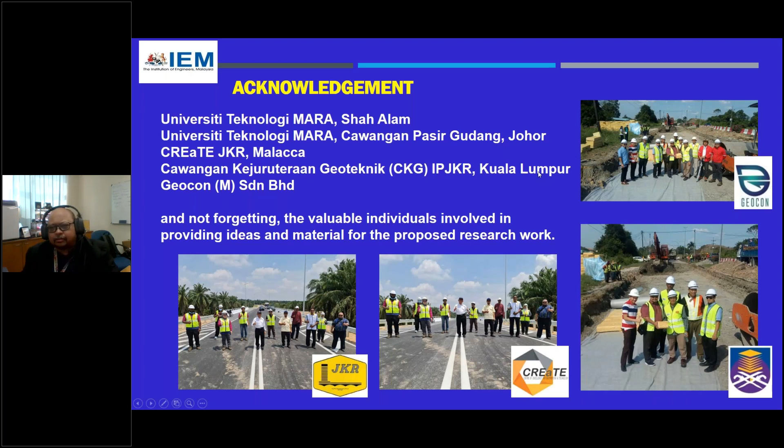It has soft to very soft shear strength, undrained shear strength, so the resistance is quite low. It is always prone to consolidation settlement. Even though we have constructed the road, surcharged it, and filled the embankment to provide a proper platform for the level, you still have continuous settlements after it is in service, especially at the transition section between the bridge and the earth embankment, or the pile embankment approach to the earth embankment.

So to understand the behavior of soft clay, the concept of consolidation has always been the key. We want to come out with ideas to resolve the excessive settlement that the soil experiences when you have overburden pressures.

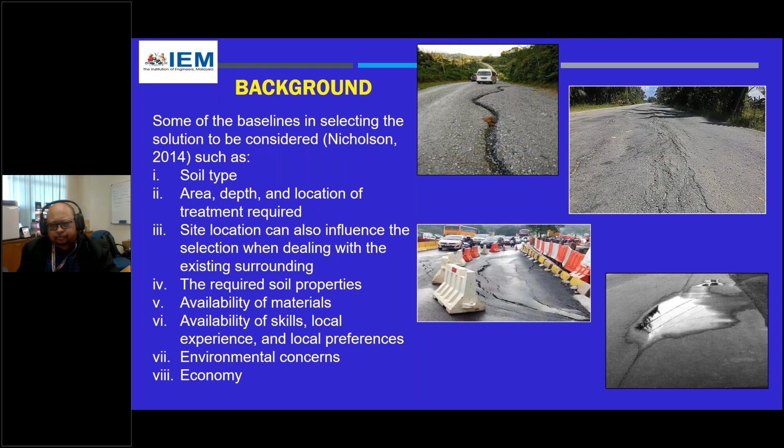Now, I want to share an idea with everyone here: we are trying to integrate between the volume change behavior and also buoyancy. So the idea is to use a lightweight material.

We talk about settlements—they are basically divided into three phases: immediate settlement, primary consolidation settlement, and then secondary compression. Now, the thing that is always causing problems for us is the consolidation settlement.

When we actually build our embankment, we estimate the consolidation settlement based on the compression index or the coefficient of volume compressibility, either CC or MV. We look into the compression characteristics of the soil, and how long it takes for the excess pore water to dissipate.

So we are talking about the development of excess pore water pressure, because hydrostatically the water is there in the ground. But as you load it, it generates excess water pressure, causing a massive effect to the soil. The dissipation of this excess water pressure reduces the void ratio, and as the void ratio reduces, you have a volume change, which is settlement.

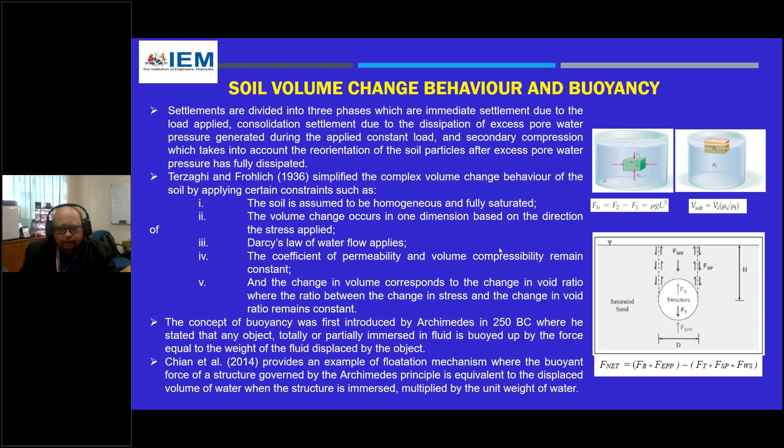So here's the concept: you have a fluid that exerts a net upward force on any object it surrounds — that is the buoyant force. This force is due to the increased pressure at the bottom of the object compared to the top, and it acts at the bottom, which stabilizes the lightweight material.

If you consider a cube with sides L, the buoyancy force equals F2 minus the force acting downward on the material, which equals the density of water times the gravitational acceleration times the volume of the material.

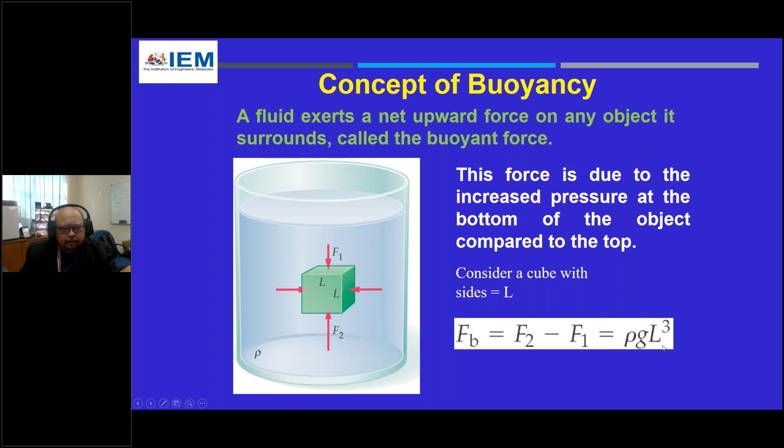So the fraction of an object that is submerged when it is floating depends on the densities of the object and the fluid. So your submerged volume, or solid of volume with density, floating in a fluid of density. So you have that volume submerged equals to volume of solid times the density of solid over density of fluid.

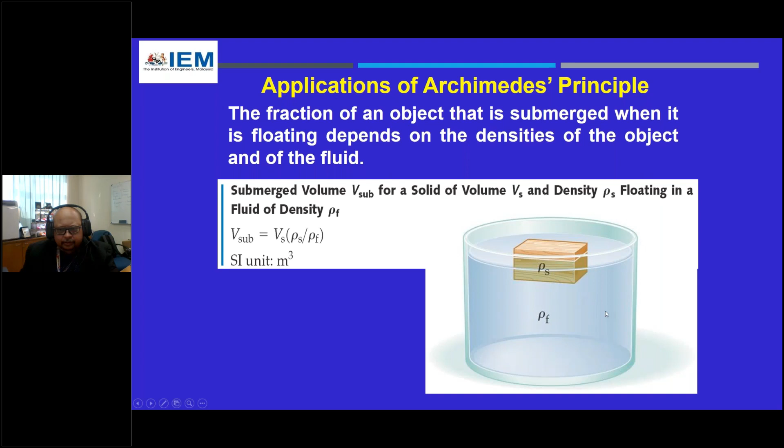So interesting thing is, how is it going to be integrated in consolidation? Sometimes you wonder, right? You have an embankment, the ground, you have the soil, fully submerged, loaded, experience settlement. And when you experience settlement, you have a displacement of water, which is the excess pore water pressure basically dissipating, going back to hydrostatic water level. Now, when you talk about consolidation, it is basically removal of excess pore water, not removal of water. If you're removing the water, it's still there in the ground.

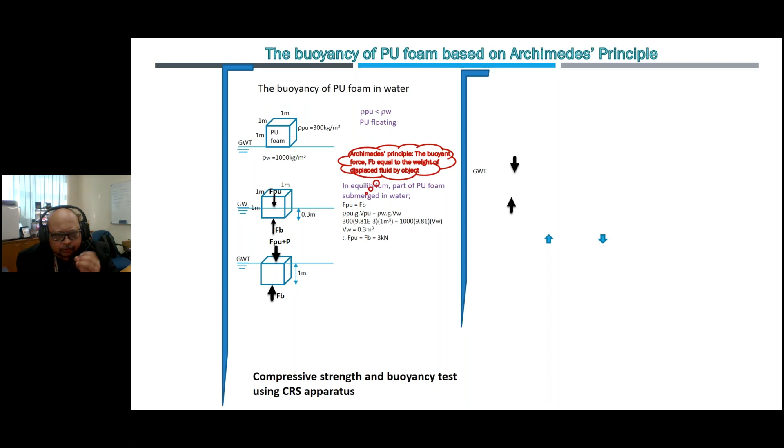So it is a removal of the excess pore water pressure that is generated from the load. Now, in the case of buoyancy, Archimedes principle: the buoyant force equal to the weight of displaced fluid by the object. So the buoyant force of the PU foam is equals to Fpu, which is 3 kilonewtons.

So how to make the PU foam fully submerged below the groundwater table? You have to add load. So the load there plus 6.81, because initially the buoyancy force is 9.81 kilonewtons, pressure is kilonewtons per meter squared. So you need force of 9.81 minus 3 to actually have the foam fully submerged in water. So the additional load would be 6.81 kilonewtons.

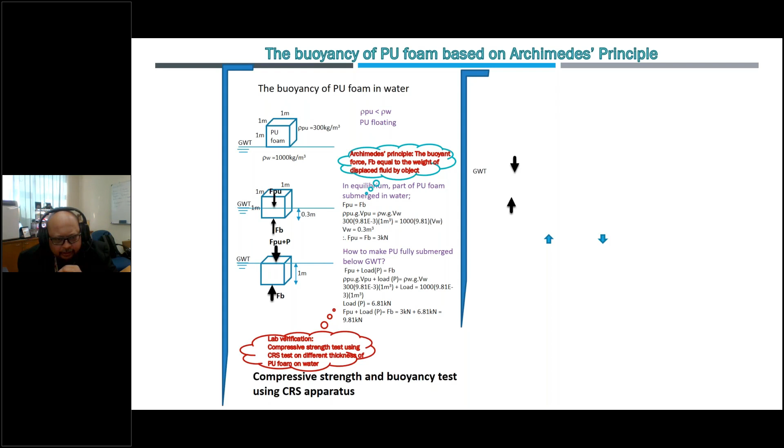And this has been verified from the compressive strength test, using the consolidation test, using the CRS test on different thickness of the PU foam.

So how do you get that into saturated soft clay? Say you have 1 meter PU foam in stiff clay. So the PU foam is placed below the ground level. And to ensure the PU foam is placed below the ground level in saturated soft clay, first condition, you have to do a test.

So it's proven from the CRS test, for stiff clay and also for soft clay. So this is the result from the calculation. So you have the buoyancy force must be more than the force from the polyurethane for uplift to occur. So to prevent uplift, you have to apply a load P. So that is where you have the buoyancy force 9.81 minus the load from the PU foam, so you have an additional 6.81 kilonewtons. So if more than 6.81 kilonewton load is applied, that means you have vertical displacement.

This has also been verified using numerical simulations and laboratory tests. And during the time of this research, we have conducted also a buoyancy test in Rowe. The buoyancy test, and for your information, water is incompressible. So you have basically the bulk stiffness of water of about 2.2 gigapascals, whereas the stiffness of the soil varies from soft to stiff, between 1 MPa to about 100 MPa.

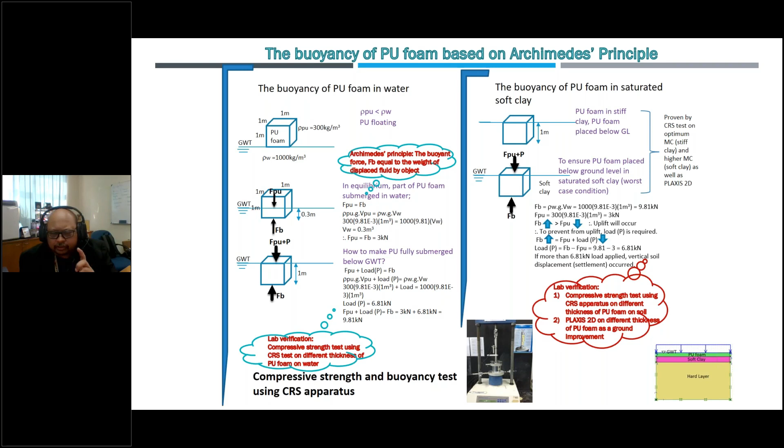So we look at the theory of consolidation. Now, the thing is, in consolidation, for initial stress, Terzaghi introduced this spring, piston and water analogy. So you have a spring as the stiffness of the soil, and then you have water. So as you load onto the spring and water, it will actually generate excess pore water pressure.

So when you open the valve, allowing the water to actually dissipate, it will cause volume change. That means it will cause settlement. And at this time, the excess pore water pressure starts to decrease or dissipate. So when it goes back to hydrostatic pore water pressure, the ideal condition of Terzaghi's theory is that there will be no more settlement. So it's achieved 100% consolidation, and you would have no settlement anymore.

But in reality, after the soil has experienced primary consolidation, there is secondary compression, where settlement still occurs but at a minimum rate, as reorientation or rearrangement of the soil particles occurs. This is in saturated clay.

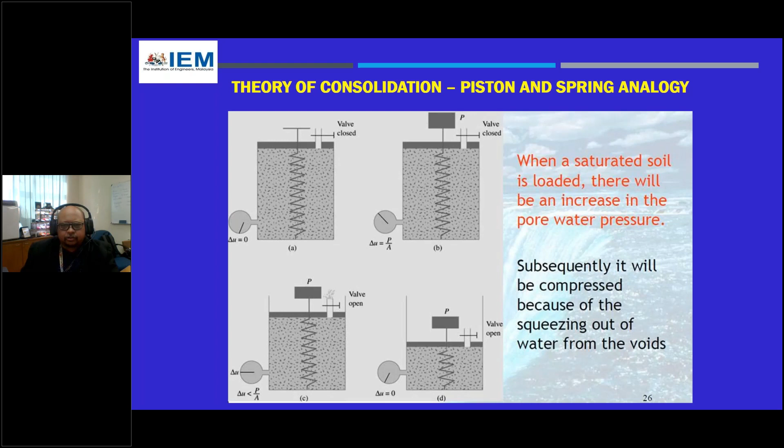But if you're talking about peat soil, they have another phase, termed tertiary compression, due to the disintegration of the organic material in the peat. That's the problem with peat soil - it's always compressing, and it has extremely high moisture content, more than the solid body itself.

So to make things easier, we want to understand the concept of consolidation. We take a clay layer at the center with thickness H, with sand layers at the top and bottom. This sand layer acts as a drainage path for water to flow, and presumably this is one-dimensional consolidation. So we put it in an oedometer casing, a specimen of 20 mm height, 50 mm in diameter.

Can all the participants see my arrow actually? If not, can just... Dr. Aswani, can you see my arrow slide here? Yes, yes, okay.

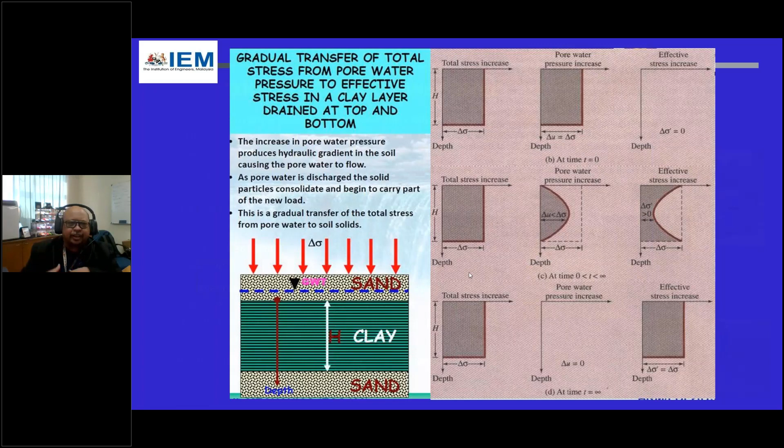With that theory, we've come up with a lightweight material to address this problem. One of the lightweight materials I use for construction and rehabilitation is polyurethane foam. It's either a single-part or two-part polymer, within the carbamate group, referred to as the urethane groups in the backbone of the structure.

When it is two-part, it is a reaction between the isocyanate part A and the microglycol known as the polyol, or a combination of microglycol with chain glycol extender. To understand it easily, the isocyanate part A is the hardening agent, whereas the microglycol or polyol is the expansive agent. You mix that together with a certain ratio, and you get this PU foam expanding almost 10 to 20 times its liquid volume.

This is where it actually reduces the cost of the works and the injection part. I have introduced this polyurethane foam injection system for rapid ground repair and remediation without excavation and replacement, so you don't need a very big excavation. Basically, to repair the subgrade, we can just inject it, and it will restabilize the subgrade by increasing as it expands, recompacting and increasing the density of the soil, densifying it without applying additional overburden pressure to the foundation soil because it is lightweight.

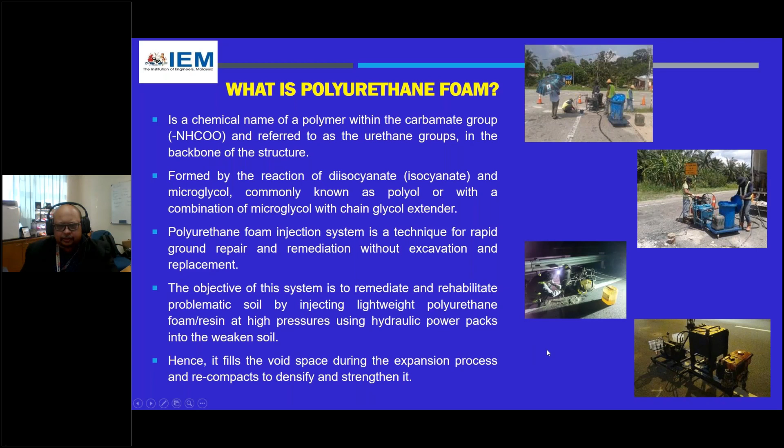Basically, this foam has two types: one is hydrophobic, and the other is hydrophilic. Hydrophilic polyurethane is basically not suitable for ground repair, but if you want to plug an area with a lot of moisture or water, or capillary rise, you can use hydrophilic polyurethane, because when in contact with water, it will expand up to 5 to 7 times its original liquid volume with the presence of moisture, where you have water content.

However, for ground repair, we use the hydrophobic type, which actually expels water.

The rate of expansion is between 6 to 20 times its liquid volume. Based on my experience, when we want to inject into the ground with loose material, it will expand up to 10 times. When it is voided underneath a pile, embankment, or slab, it expands approximately up to 15 times its liquid volume.

So, hydrophobic polyurethane is a foam with an accelerator to control the curing time. The advantage of using this foam is that it can expel water during expansion before it stabilizes the soil. The polyurethane is basically a lightweight material with high insulation quality, high expansion rate, and quick reaction time.

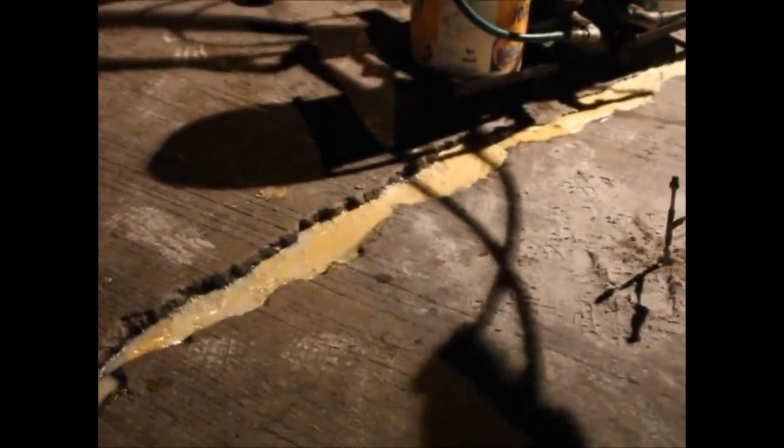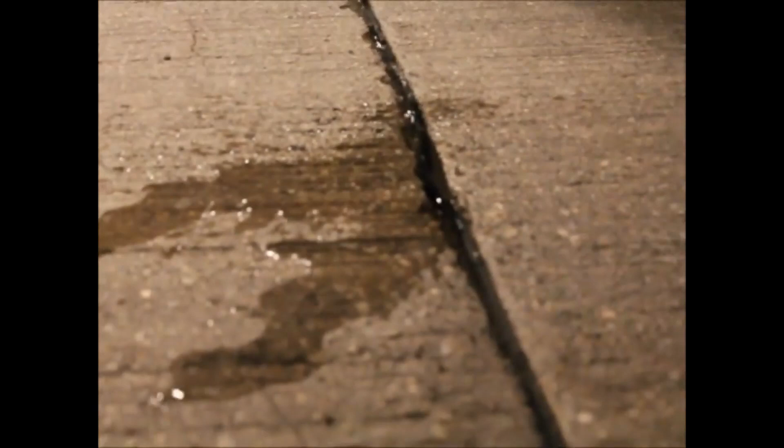Okay, back to my screen.

From the emergence of the PU foam injection system as one of the alternative methods to solve ground settlement issues and rehabilitation of existing superstructures and infrastructure, we thought we want to introduce something like an EPS type. Instead of EPS blocks, we introduce a flatbed, or you can say mattress, right? A polyurethane flatbed, to reduce the overburden pressure for new construction of embankments and platforms.

At the same time, we want to introduce buoyancy to reduce the effect of settlement on soft saturated deposits. Therefore, the idea of integrating consolidation and buoyancy is the key in designing and constructing the PU flatbed, to support the platform above it and also provide buoyancy, therefore reducing the effect of consolidation settlement.

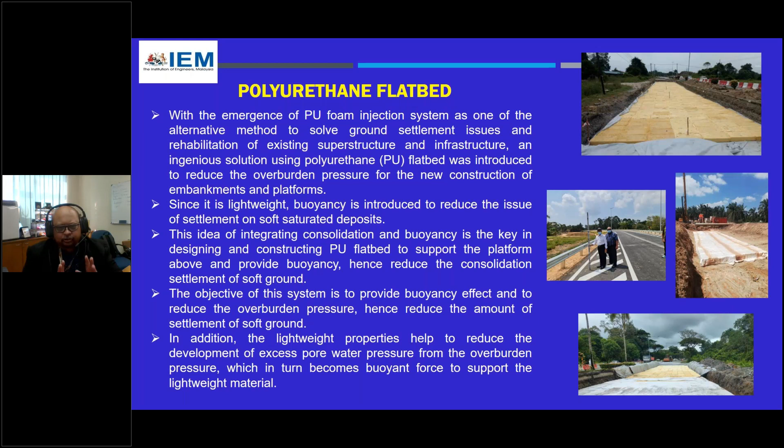So the objective is to provide a buoyancy effect and reduce the overburden pressure, hence reducing the amount of settlement of soft ground. This lightweight property helps reduce the development of excess pore water pressure, which in turn becomes a buoyant force to support the lightweight material. So instead of the excess pore water pressure dissipating laterally anywhere in the soil, it basically transfers as a buoyant force to support the lightweight material.

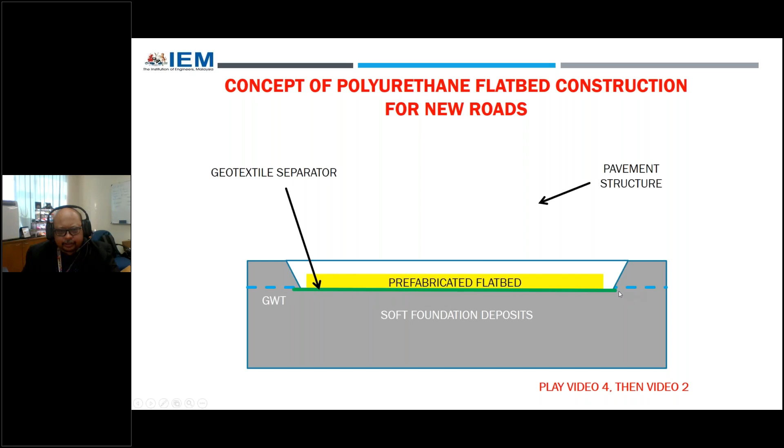So here is the concept. You have, let's say, a soft foundation deposit. You excavate, then place the geotextile separator and wrap it. Then you place the PU flatbed, wrap it, fill it, and construct your road.

Now, can you play video number 4? Then play video number 2.

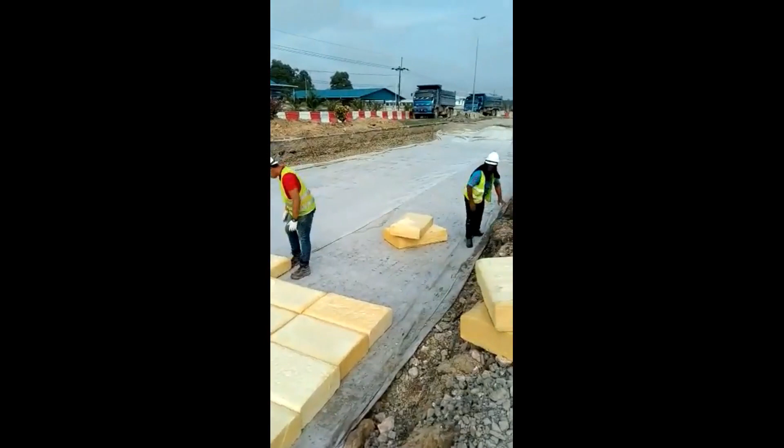Okay, this is how it's being placed on the excavated area. You can see it is very lightweight, and you can arrange it easily.

So it's actually quick. When we did this, about 50 meters long, it took them only about 4 days, together with the gluing.

If you take a concrete block, it's quite difficult to handle at this size. This material is lightweight, only about 80 to 150 kilograms per cubic meter.

Okay, can you play the second video where you have the gluing?

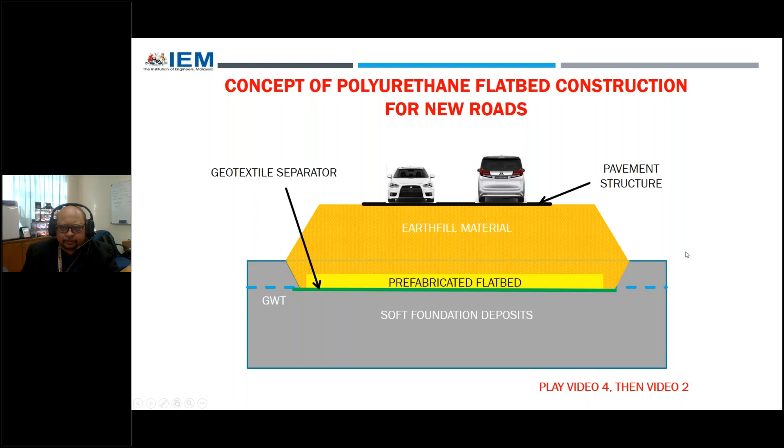So basically, how do we want to actually design this now? I considered this idea with the team, the research team, and also with the PhD students. So we came up with the idea.

When we want to design the PU flatbed, we take into account the effect of consolidation and buoyancy. The consolidation settlement equation was modified to integrate the buoyancy effect of the PU flatbed. Hence, the pore pressure due to the PU flatbed, U_HPU, is introduced. Since the lightweight block is introduced, the existing hydrostatic pressure U naught is also taken into consideration.

Initially, when we calculate for consolidation, the variable here is actually sigma naught prime, the effective stress of the soil, considering consolidation whereby the water dissipates as you consolidate.

But in this case, when you introduce a lightweight material, you have that hydrostatic pressure initially there. It's like water—you're putting something on top of water, then it floats. Put a barge on top of water, it floats. Then you put sand a little bit on top of water, it still floats, partially submerged, but it still floats. So what is actually holding it up?

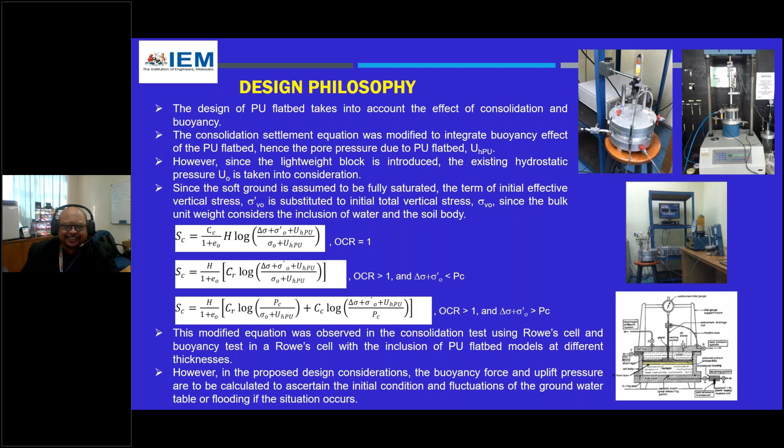We recorded the settlement - the uplift is between 2 mm and the settlement is 2 to 4 mm. So I say, alright, should be okay. This is the test that we conducted, the Rowe cell apparatus. We did a buoyancy test where we put in only water and a PU material on top, to see the compressibility of water, since water is incompressible. I'll show you the data later.

And then the other one is the CRS test, with inclusion of PU foam and the soil. In the Rowe cell as well, we also did a soil sample and PU sandwiched between the sample and the loading diaphragm.

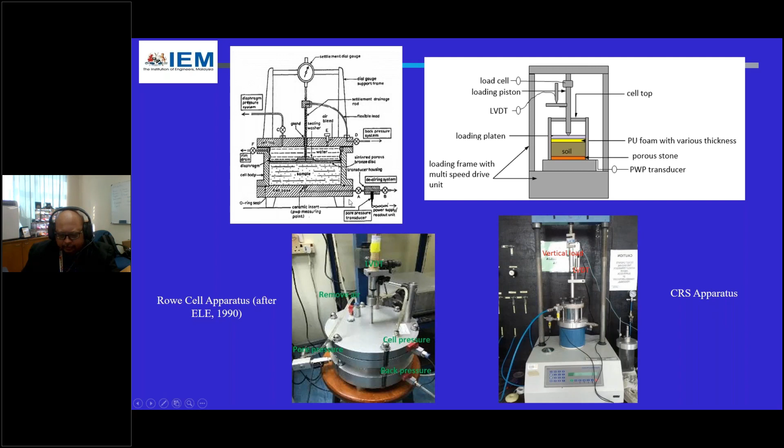So this is the testing material - you can see two parts of the PU foam. The tea color is the polyol, and the black, coffee color is the isocyanate. You mix that together, agitate it, and it starts to expand within 5 to 10 minutes. Then you wait half to 1 hour for it to cure to 2/3 of the strength, and you want to wait for it to fully cure after 24 hours.

So basically we did the consolidation test and buoyancy test in the Rowe cell to control the distribution of pore water pressure during the consolidation and volume changes in the cell during the test. In a Rowe cell, the test sample is loaded hydraulically by water pressure acting on a flexible diaphragm, as shown in the diagram. The drainage of the sample can be controlled, hence you can measure the pore water pressure. Back pressure is applied to simulate the in situ soil condition.

This test, on the loading, follows similarly to the oedometer apparatus, whereby each load is applied constantly for about 24 hours. We observe the displacement and changes in the pore water pressure. As the excess pore water pressure dissipates and becomes constant, then we can apply a second loading stage.

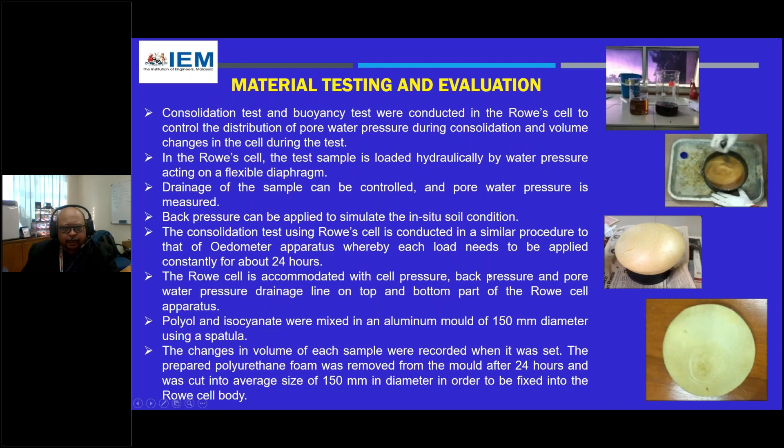Okay, this is how we mix it. Mix the two, and then wait for it to expand, and then we cut it nicely so that we can fix it into the Rowe cell.

If it's water, then we fill water and put it on top. If it is soil, then we put the PU foam on top of the soil, right?

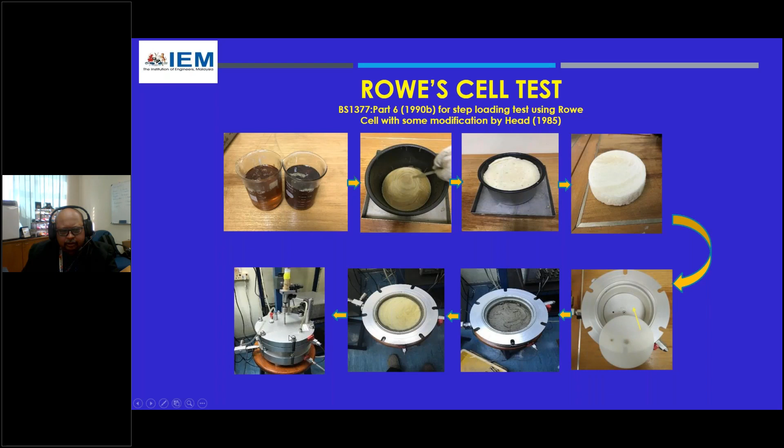Similarly, this is what is being done in a constant rate strain test. Okay, unfortunately this one has some difficulties in making it cylindrical, right? Then we place it on top, put in the load cap, and run the test.

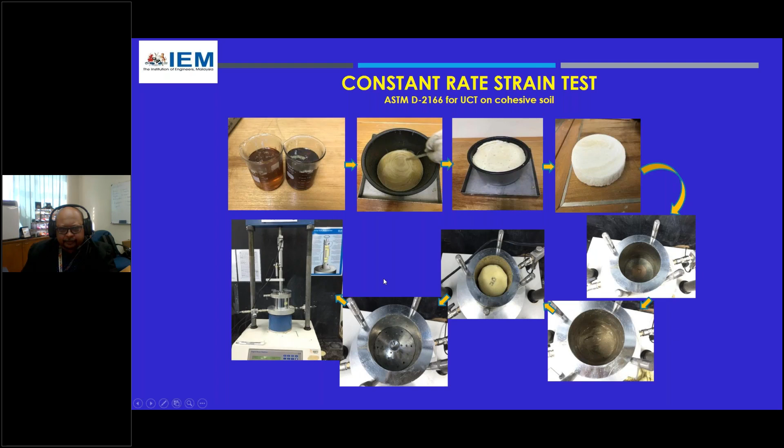So for material properties, you can see this is different sizes of the PU cylindrical sample, with different ratios: 1 to 0.5, 0.25 to 1, and 0.75 to 1. And we did the UCT test to determine the different variation of the mix.

So this is the scanning electron microscope image of the polyurethane foam. You can see this is the polyurethane foam, with a lot of voids. And then the inclusion of the polyurethane foam together with the soil.

It doesn't look too different, but you can see you have this layer of soil and then you have the foam, voided, actually filling the voids in between the soil particles.

So we did this material test, and we had a different range of mixes, and finally we got the compressive strength. And these are the ratios that we tried to adopt.

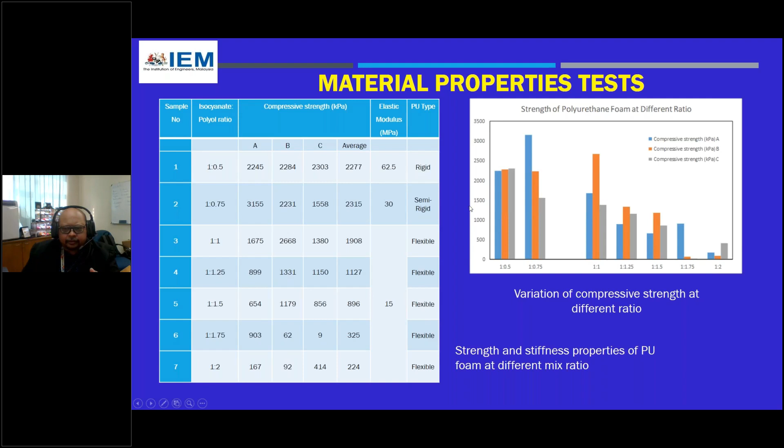So hence we summarize the properties of the foam. You have 0.8 to 1.5 as the unit weight, between 80 to 150 kilograms per cubic meter, and stiffness modulus 15,000 to 62,500, and the Poisson's ratio, compressive strength between 240 to 2,300 kPa, and then its permeability.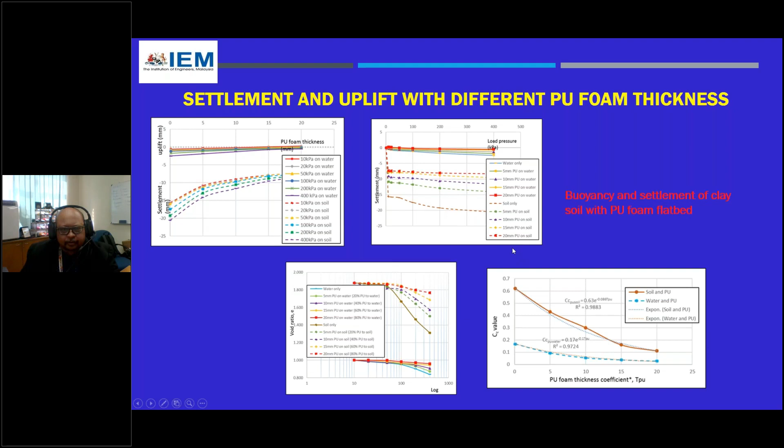So how do we do this on site? This is one of the test sites, basically in Sibu, Jalan Lapangan Terbang. I think about chainage 800, not kilometer 800. Chainage 800.

So that area is badly experiencing undulation and also rutting. So we excavate that to about 1 meter, and then we basically need to introduce a trench for when you have water filling in this excavation, so that the water could actually flow out from the construction site.

And then we roll that area, make it smooth so that we can have a flat surface to lay our geotextile, and then we arrange our PU flatbed and glue it. Once it becomes one homogeneous panel, a very big panel, a PU mattress or flatbed, then we backfill and compact it.

And then, of course, we resurface it. Later, I will show you the product of this work.

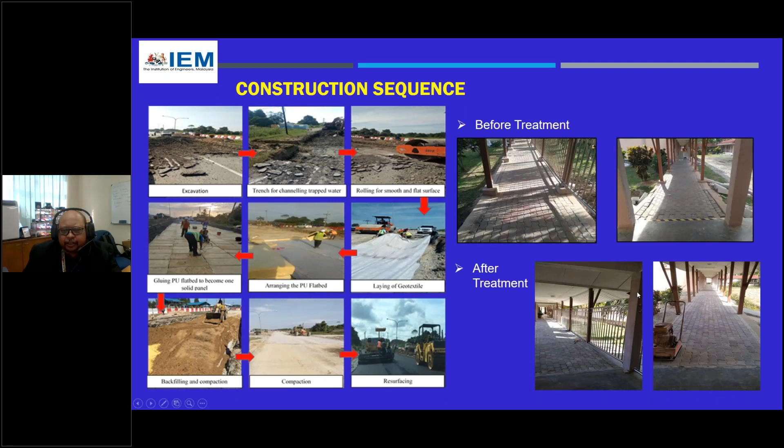So we actually have the data, I will show you later on. We did a 6 month monitoring after we had treated and repaired that particular area. So these are the settlement points, and that is the temporary benchmark fixed on top. That is the walkway to the hotel kitchen, and this one is near the swimming pool.

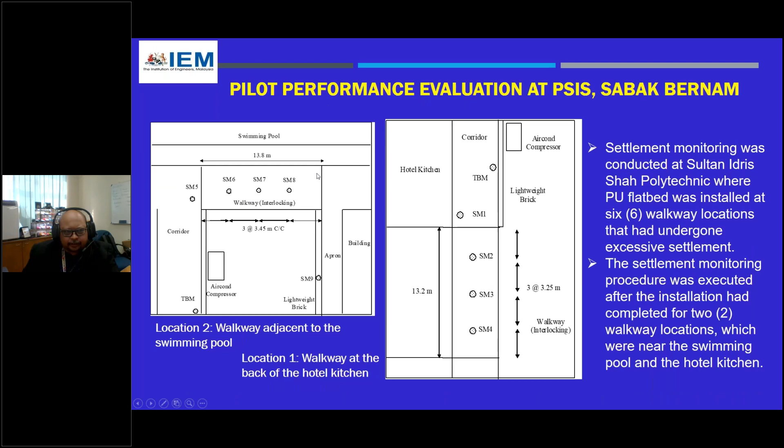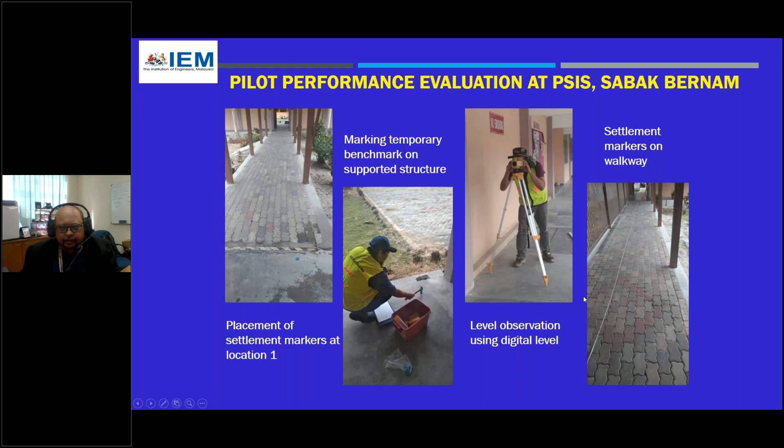We did leveling. Procedure: we install markers, settlement markers, and measure using the digital level, and that is the result of the settlement after 6 months. We did that basically in 2018 after it was constructed, and we monitored settlement. After 6 months it's roughly about 10 millimeters, so roughly about 1.35 to 1.83 mm per month.

So this is the profile. Settlement marker 1, 2, 3, 4. Of course marker 1 should not settle because it's on a fixed platform, on piles. So you have that profile, and this one is at the swimming pool. Supposedly it should not be uplifted. This is settlement marker 5, which is on the rigid platform and supposedly should not experience uplift. But here you can see it only settles less than 10 mm.

So I would say it works. It's an alternative you can use, but if it's not suitable for construction or application, then you can resort to other alternatives, other methods of ground improvement technique.

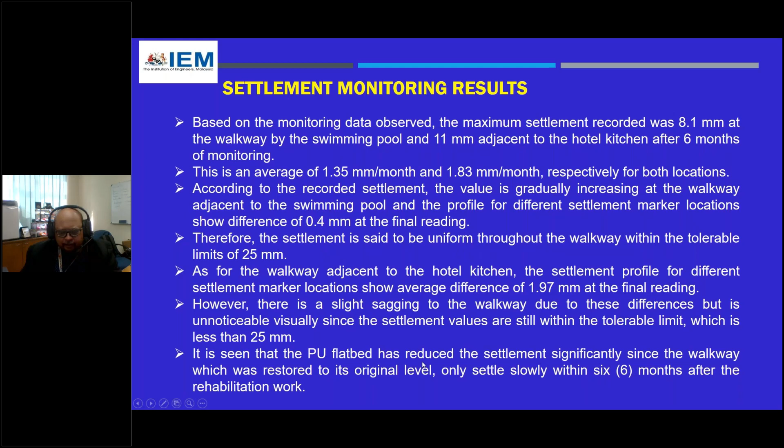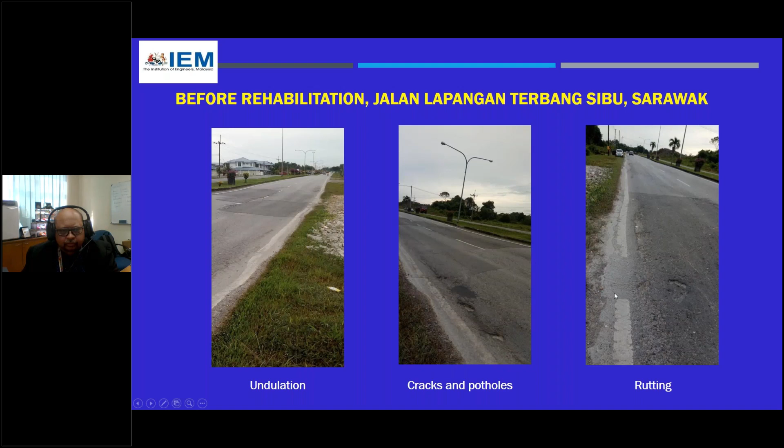Okay, this is Jalan Lapangan Terbang Sibu, another test site we did in Sibu. It's very bad, you can see that is the existing condition. You have undulation, cracks, and also rutting. So we excavate that, provide a trench, and smooth it.

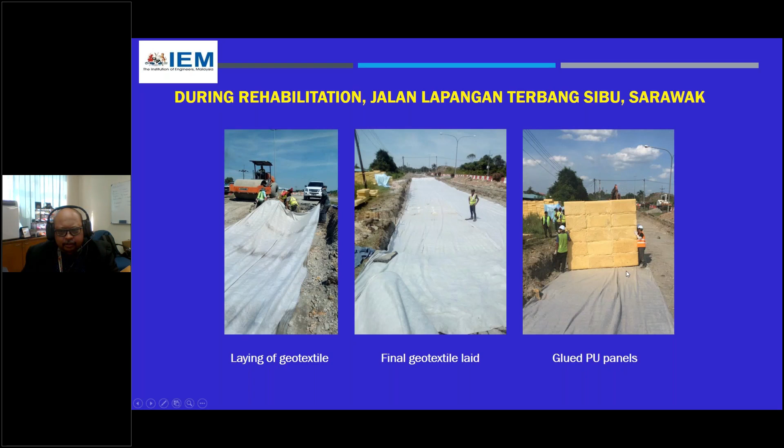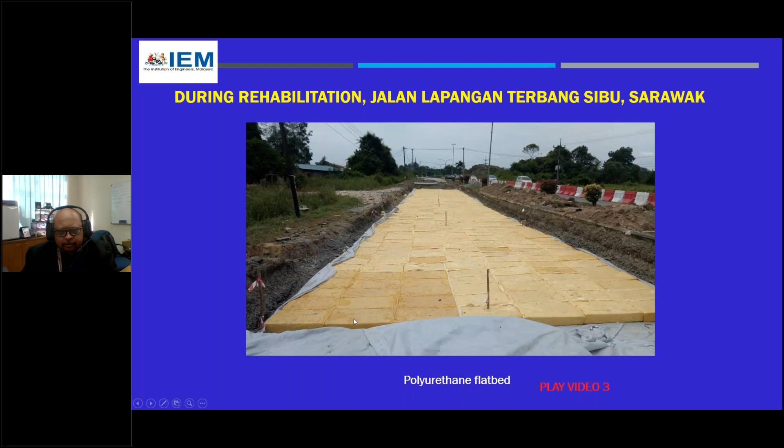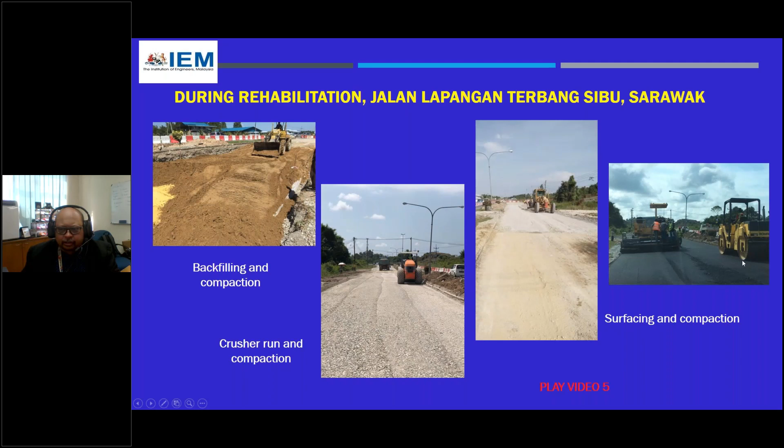We lay the geotextile, then lay the PU flatbed. After arranging it, you glue it, and then it becomes one homogeneous flatbed, about 50 by 7 meters. Very nice, right? Then we backfill this, place the crusher run, compact it to the specified density, and then surface it with bitumen so that you have the pavement on top.

And finally, this is the product. This is the site visit after 14th June 2020. We did that in 2018, 2019, so this is the condition of the pavement after 2 years.

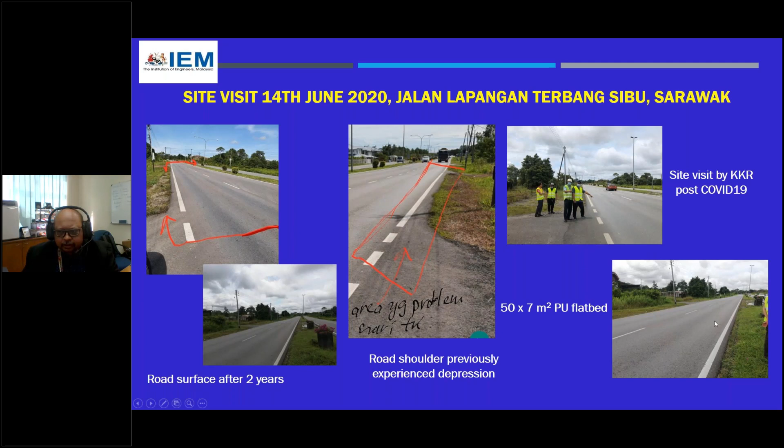And this is after 2 years, still intact. I just came back from Sibu last week and we went onto this area. So we have a smooth ride on top of that pavement, but once the PU section ended, the road becomes uneven.

It's very interesting, so we requested to fix that area, but of course the budget has to come from the owner of the road, and also it has to come from the concession. So they actually provided us with another site for us to do our repair.

Why did we split it into 500 mm width? Because it's easier to handle. If it's 1 meter by 1 meter, it's quite heavy with the PU itself for an individual to handle, but you can have 2 or 3 people carry it. It's quite mobile in terms of its weight.

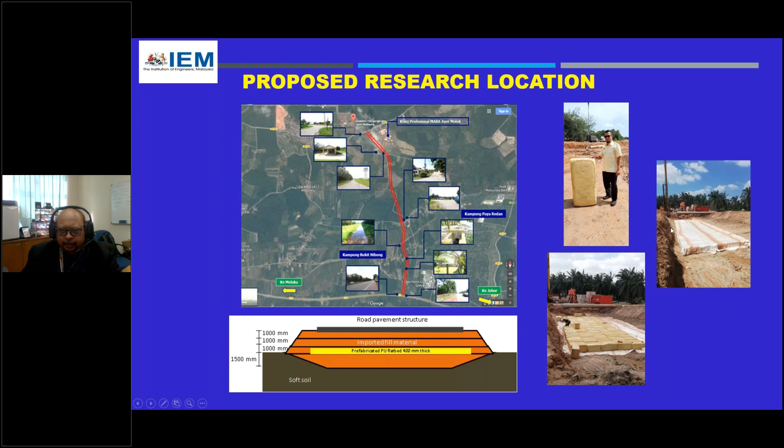Then we actually wrap it, and then we fill it. This is the side. We put it at the transition section between the pile embankment and the earth embankment. The other side is maintained using the transition slab. So this one we use the PU flatbed.

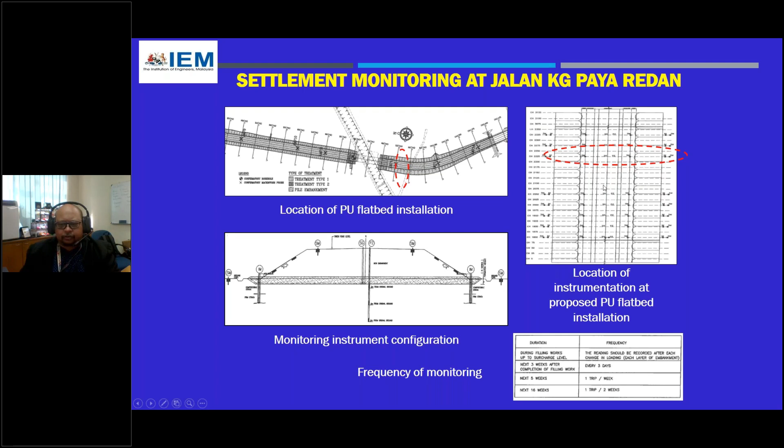So we monitor that. There's a series of monitoring settlement instruments for us to observe, and we did a finite element simulation. We take the soil properties and the PU flatbed properties as well.

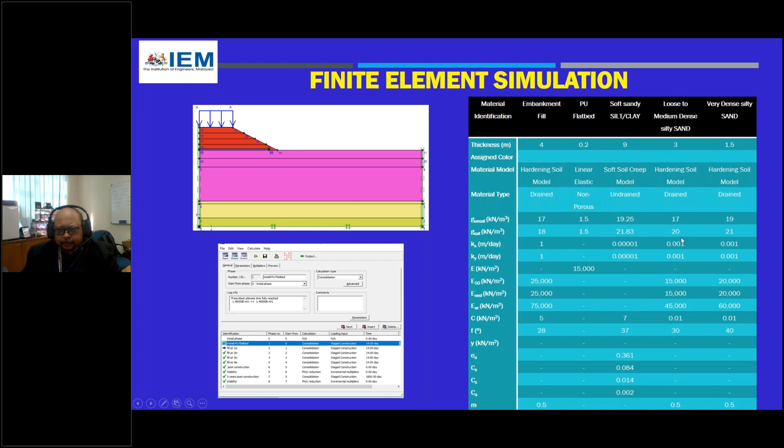You can see here, we are using advanced soil models for the fill, hardening soil model, and for the soft soil, we use the soft soil creep model. And this is the results of the simulation.

So we introduced different thicknesses of PU. Initially we used 400 mm PU flatbed because the supplier said that is actually the cheapest. Of course, 200 mm is the cheapest, but the optimum design is actually the 400 mm thick flatbed. So we did the simulation, and interestingly, the settlement reduced significantly, from 259 to only about 199.73. That's about 60 mm reduction.

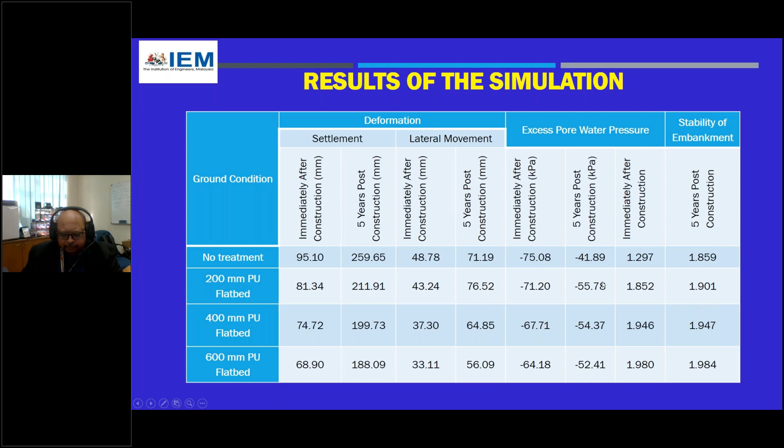And then you can see the pore water pressure dissipation has also reduced. The development of excess water pressure has reduced because the previous 3 kPa has become the uplift pressure, and you have increased stability, about 1.947. So these are the settlement simulations.

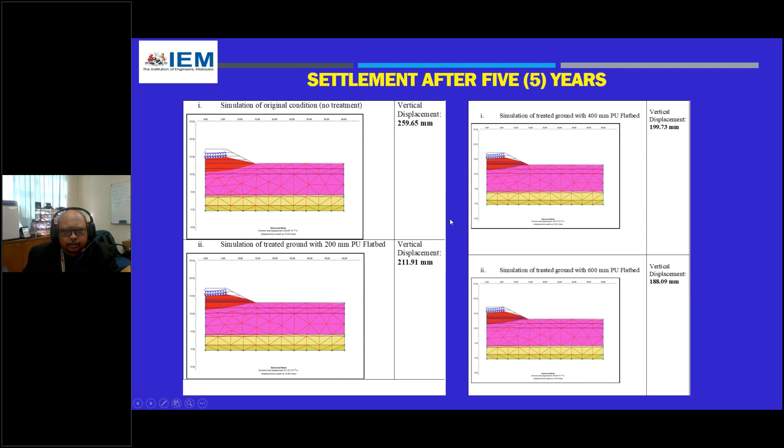And I would like to thank my master's student. At the time, he was doing his dissertation, and I was also attached with JKR CKG. So we basically had heavy discussions on how to run this simulation. It's very proactive.

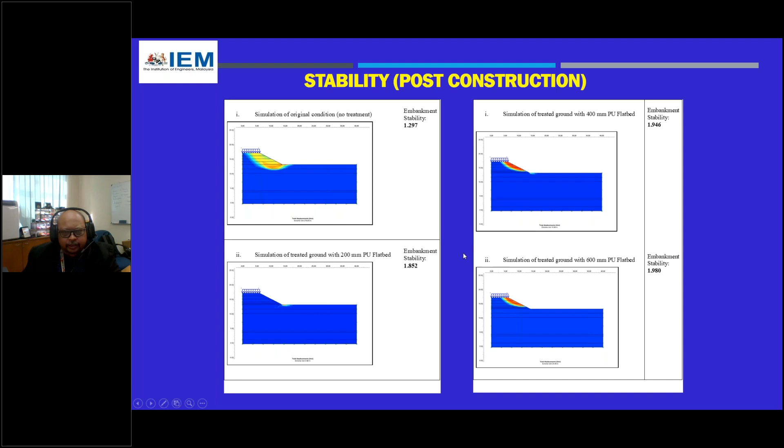And that is the results from the deformation. So then we install that at Jalan Kampung Paya Redan. That is the pile embankment, this is the PU flatbed. We glue that, and then we wrap it with the separator. Can you play video 6, please?

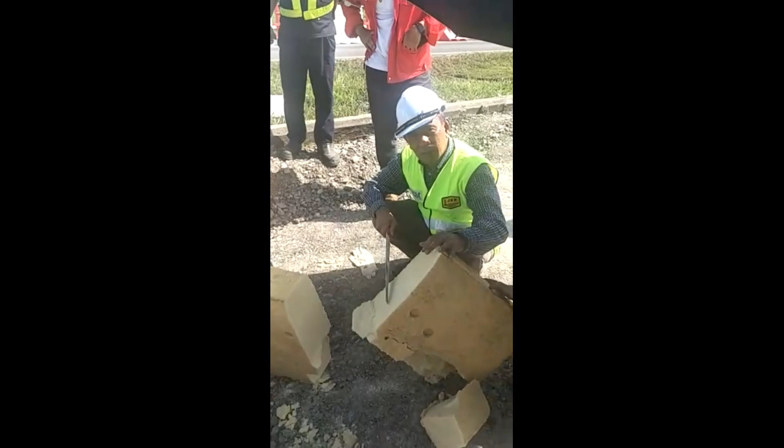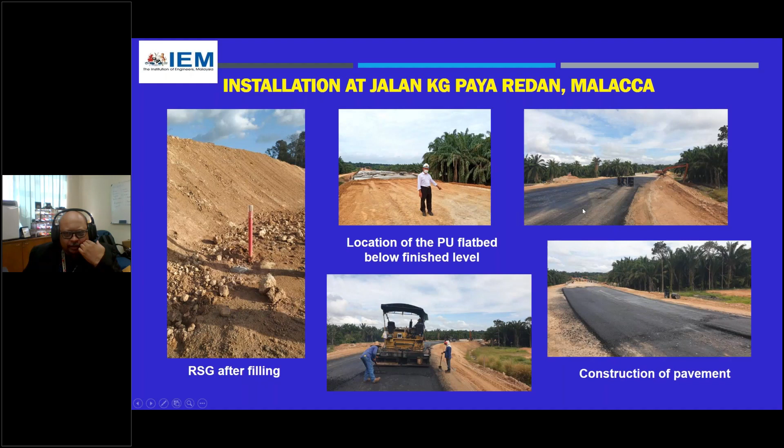So that is the installation at Jalan Kampung Paya Redan. That is the section where we have our PU flatbed. And then they resurface it. And then that is the monitoring result.

Now, interestingly, the settlement maximum is at 40 mm, but the lowest is actually at about 17, for the settlement marker set on the right hand side. On the left hand side, because it's close to a channel, possibly you have wetting at the side of the construction. Whereas on the other side where you have the transition slab, supposedly it should not settle, but it settles about a maximum of 20 mm, which is quite similar to the section where we had our PU flatbed.

So basically, supposedly the transition slab should not settle as much as the PU flatbed. So it seems that if you swap this transition slab with PU flatbed, it works similarly to the transition slab. But since it's lighter than the slab, you might have an uplift once you move past through it, and then it becomes back to its original position because of its lightweight capabilities, and it actually reduces the effect of vibration.

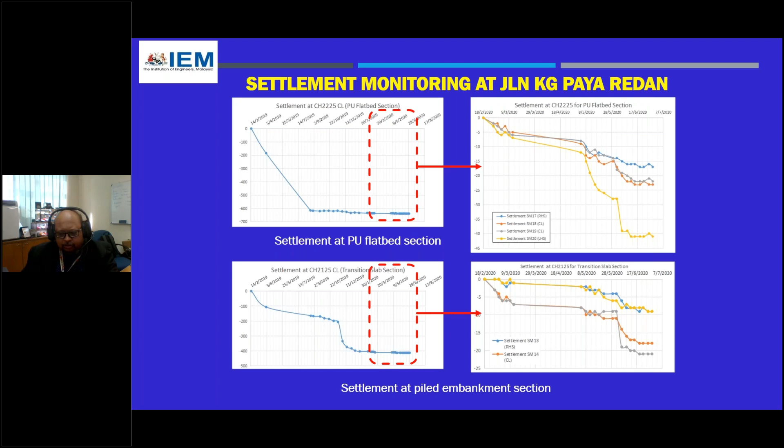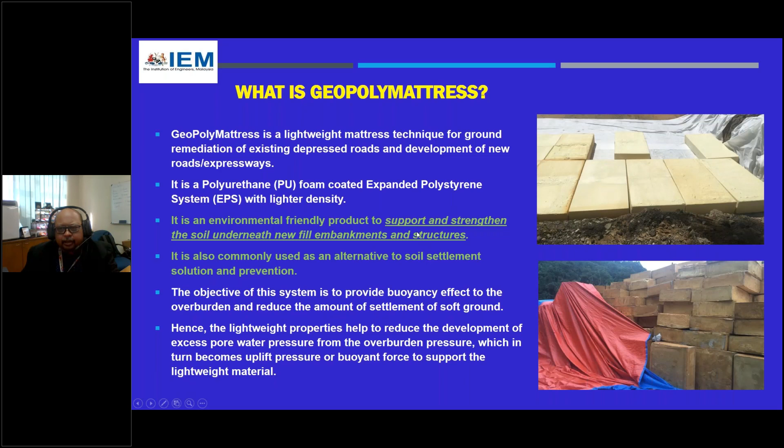So we have come out with another system which we call geopolymattress. Now, it's also lightweight, but the beauty of this geopolymattress is that it is a polyurethane foam coated expanded polystyrene system. So it is lighter and it is nicer. In a way, it looks very nice when it is foam. And of course, the objective is the same, we want to reduce the effect of settlement by introducing the buoyant force.

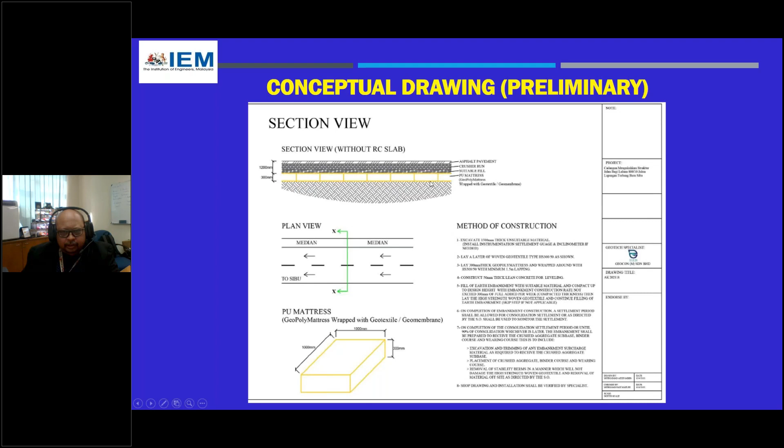And this is the design configuration of the geopolymattress, and then there's the method of construction. And we were given a project at Sibu again. And this is actually a very bad surface, it is undulating, and the undulating causes cracks and also potholes, and you have longitudinal cracks.

And then you have that diagonal cracks. Oh, it's very critical. So what we did was we excavate that area.

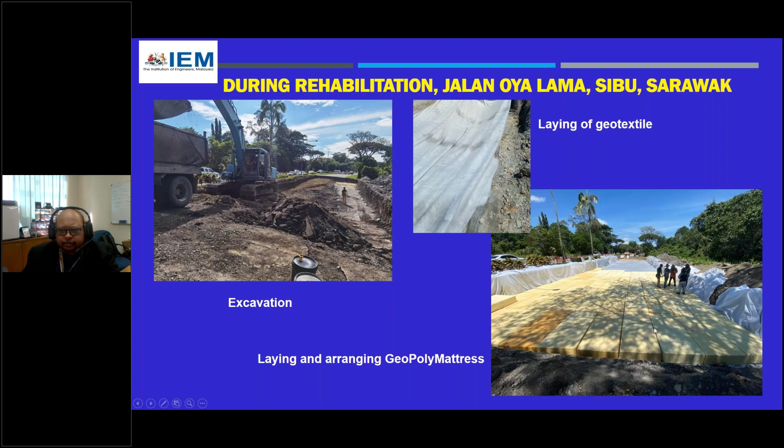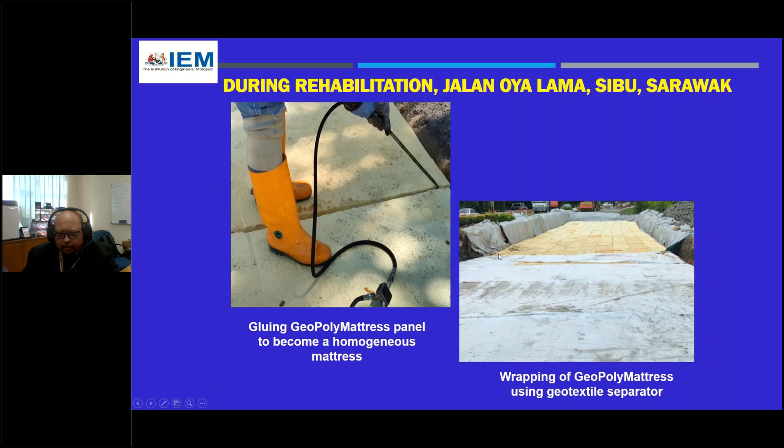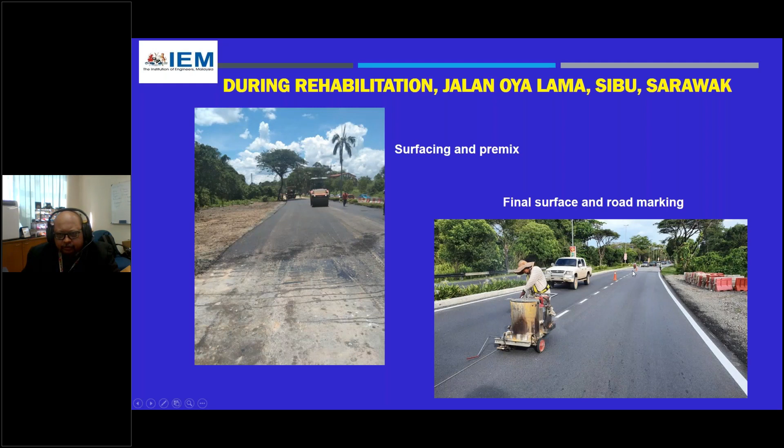We lay geotextile again, and then we place the geopoly mattress. Of course, we glue it, and then we wrap it with the geotextile separator. Then we resurface it, compact it, and form its final pavement level to the final surface and road marking. After 2 months, this is the road.

So they had a smooth ride instead of bumpy at the section where you have undulation. I just came back from there, so we did ride along this road, and so far I did not experience additional settlement.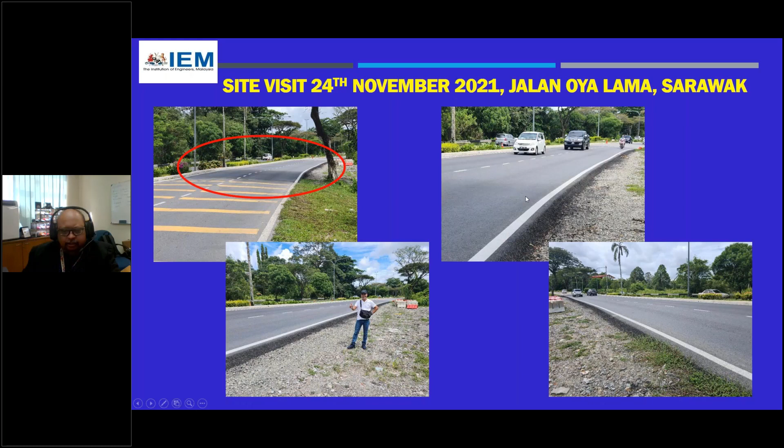So what happened was they had to put in the NJB to hold down the PU foam as a counterweight, so that later, once it has been installed, we can cast the RC slab counterweight, because the fill is quite low. This section is 1.5 meters going up to 2.2.

So we had our 0.4 meter thick PU flatbed, sorry, geopoly mattress. And then we have about a 300mm thick slab for the counterweight, so that it would not cause any uplift due to the fluctuation of the groundwater.

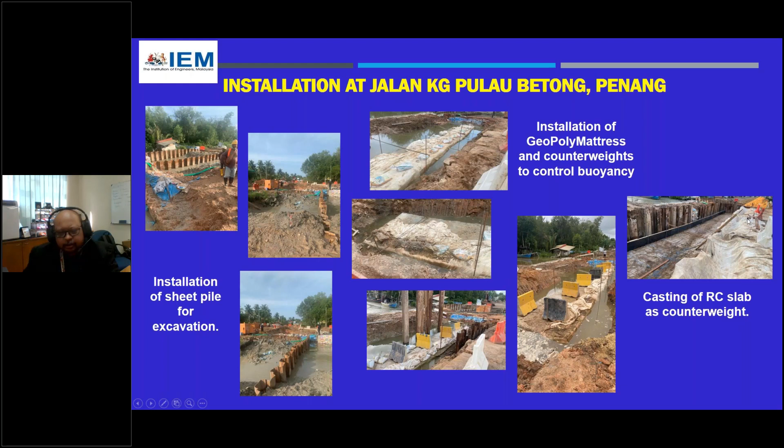And we have a verification test for that. We did a cube test. So this is the strength, and that is the test conducted on a real sample, right? That's PU, not a wood block. It's a PU foam. You have the PU foam encapsulating the EPS inside.

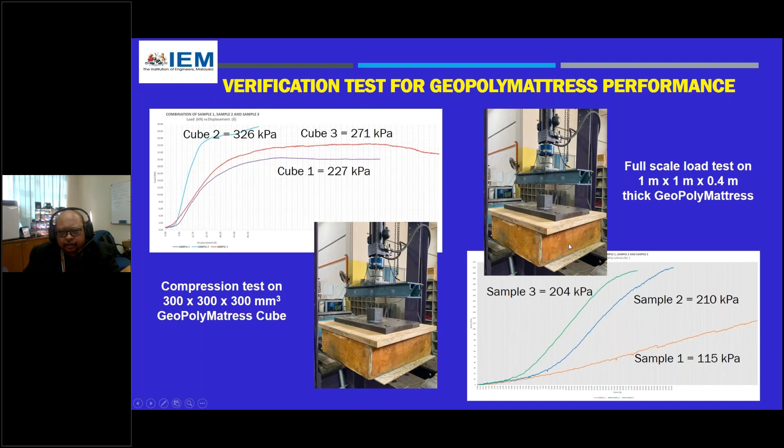So the lightweight capability shows that the PU flatbed provides additional buoyancy to reduce the effect of primary settlement. Hence you minimize the dissipation of excess pore water pressure, and since the pore water pressure becomes the buoyant force, because we are using the hydrophobic type, it is water resistant. Therefore, the PU flatbed provides a discontinuous layer between the fill and the foundation soil.

And the fill material provides counterbalance to the uplift pressure from the fluctuation of the water table. Therefore, there is no need for a concrete slab to act as a counterbalance to the uplifting of the PU flatbed if the fill thickness is sufficient. If it's insufficient, that is where we need to design the counterweight slab.

And the work provisions are quite simple, easily mobilized. You reduce the time of construction, cost of additional construction material, and mobilization and transportation. Of course, you have temporary disruption of the road. Now, for that 50 by 7 meters, you only install it within, say, a week. The most time taken is actually from the excavation and also the surface construction, the reconstruction of the pavement.

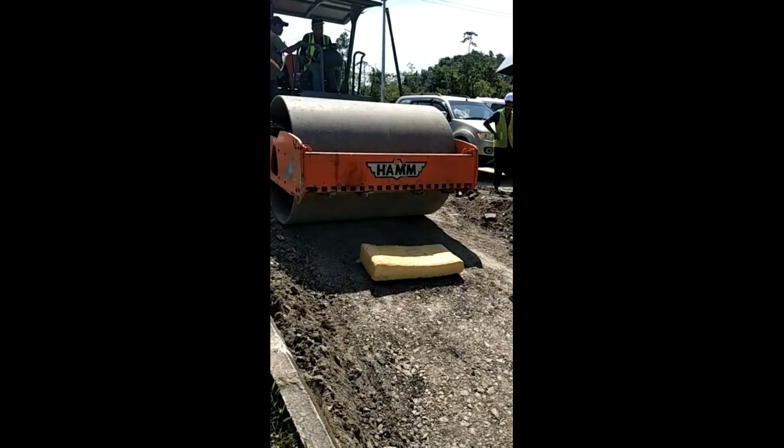So you see this is a 10-ton compactor, and that is the PU flatbed. We've taken partly the curved one. Then you can hear the cracking sound, but the compactor keeps going, riding on top of the flatbed.

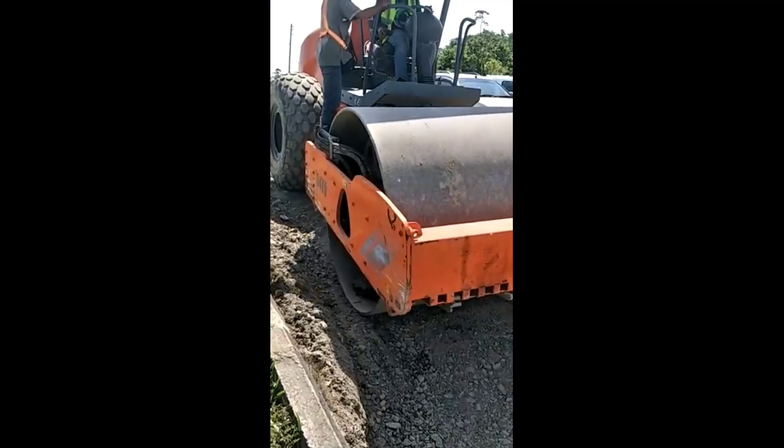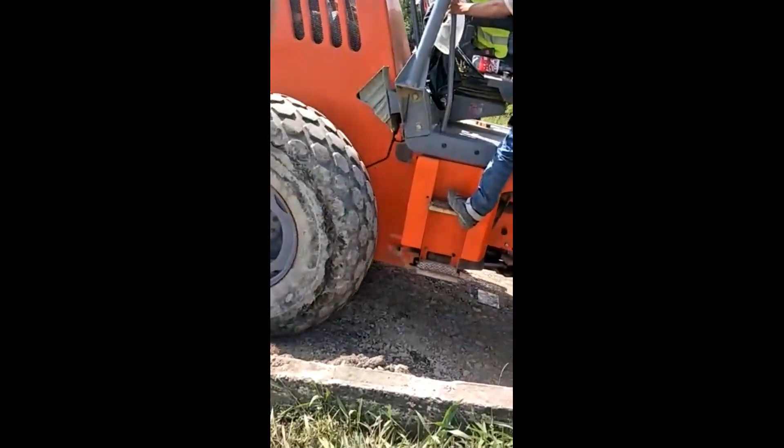There you can see it only breaks at the edge. The whole PU foam is rather intact, but we took the defected one. We didn't take the flat one. So if you take the flat one, probably you won't have that break. The cracks or the breakage are at the edges of the PU flatbed. Mr. Lim, does that answer your question?

Okay. Right, next question from Engineer. Hold on. Okay, Engineer asking about this.

There's one question from Engineer asking, given the very low permeability of soft clays, do you have actual measurements to prove that your foam expansion in the ground really expels water from within the soft clay to reduce its water content and thereby compact it convincingly, like you said? How much reduction in water content in the compacted soft clay did you find?

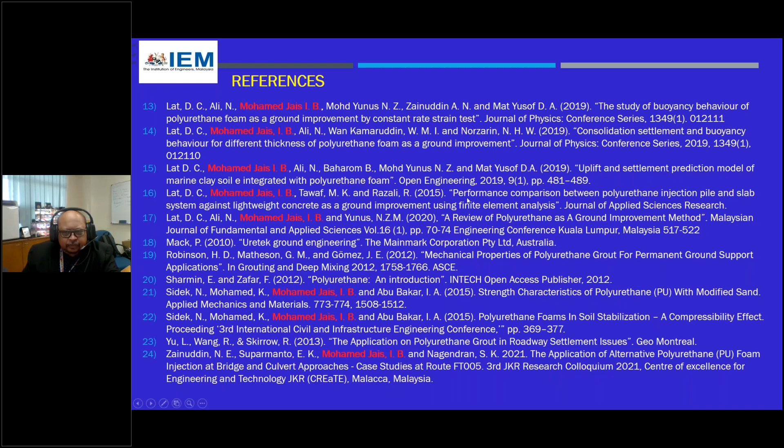We have some more down here. Consolidation settlement and buoyancy, ground improvement. And of course, the paper that I presented at the GE's conference is also there for you to have a look. Most of the papers are more onto polyurethane foam injections.

Next question from Isabel. She is asking about the Sibu site. For the Sibu site, is it clay as the subsoil condition? Does PU work on peat, as Sibu has a lot of peat as well? Thank you, Miss Isabel, for the question. Actually, the Sibu site is on peat. So the subsoil condition we worked with is peat, because the road embankment experienced a lot of undulation and differential settlement, so we did some work on peat soil.

The one in Jalan Oya Lama is not peat, it's on soft clay I think. But the one at Jalan Lapangan Terbang, that one is actually on peat soil.